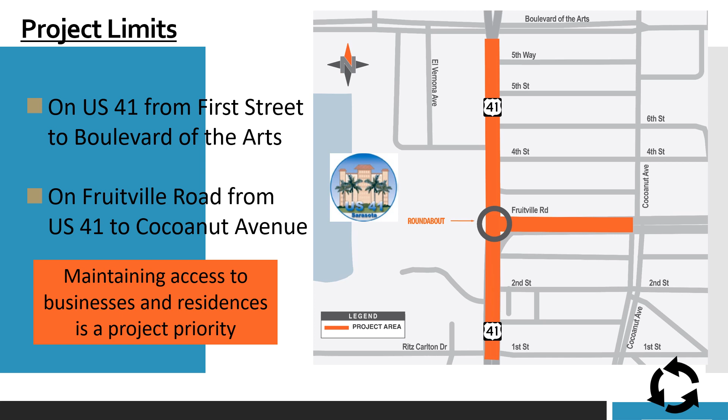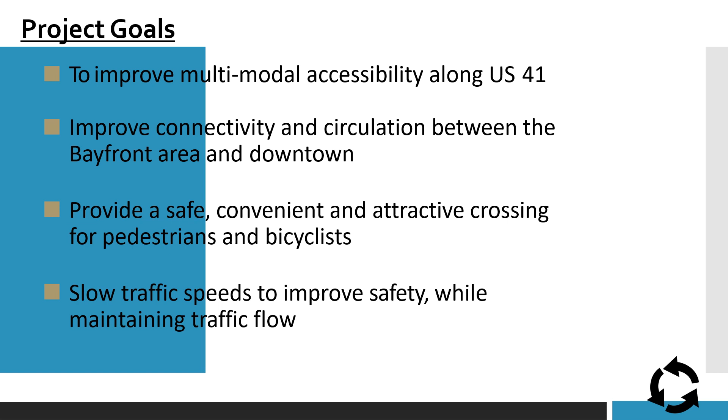The primary goals of the project are to improve accessibility along US 41 for pedestrians, bicyclists, and drivers for a multimodal roadway. The project will also improve connectivity and circulation between the Bayfront area and downtown, provide a safe, convenient, and attractive crossing for pedestrians and bicyclists, and slow traffic speeds to improve safety while maintaining traffic flow.

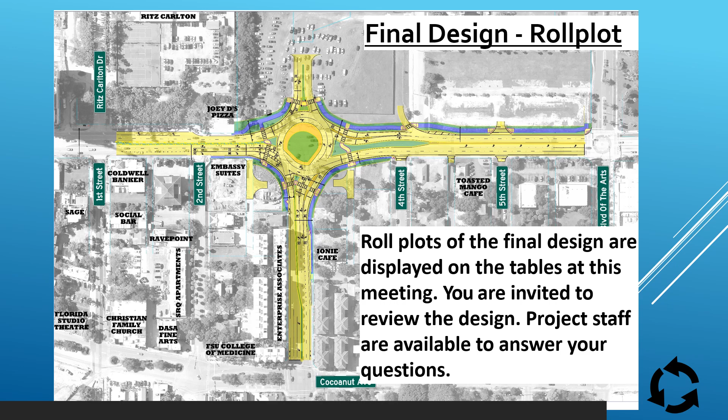Roll plots of the final design are displayed on tables at the meeting. You are invited to review the design and ask project staff any questions you may have about how the construction of the project will proceed.

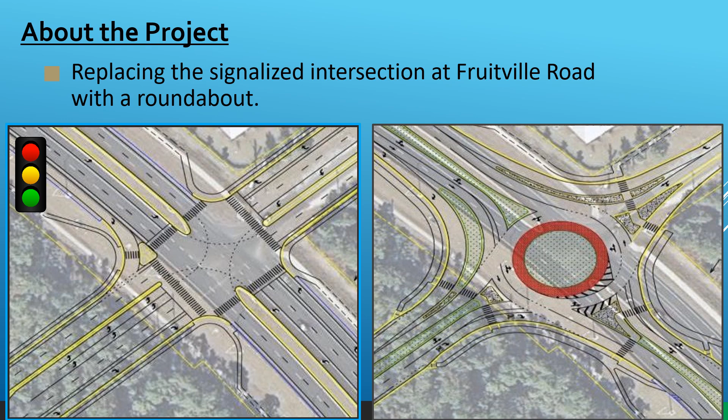The improvements being made as part of this project include replacing the signalized intersection at Fruitville Road with a roundabout, construction of a 12-foot multi-use recreational trail on the west side of US 41, and a variable width sidewalk on the east side of US 41, construction of raised islands for pedestrian refuge, installation of the HAWK pedestrian system, LED streetlights, and enhanced landscaping. The project also includes replacement of the City of Sarasota's utility and underground drainage structures and replacement of privately owned utilities and infrastructure.

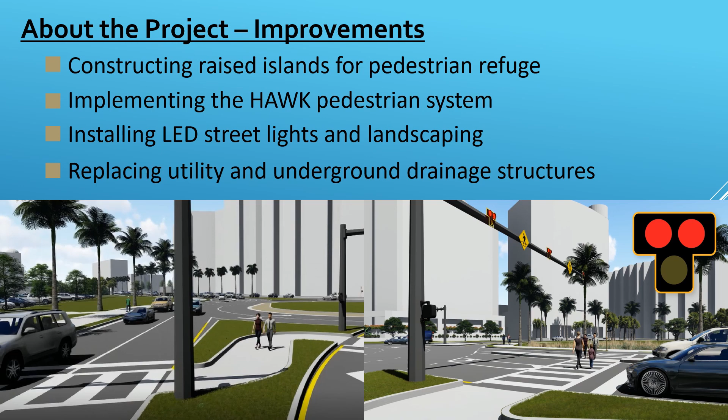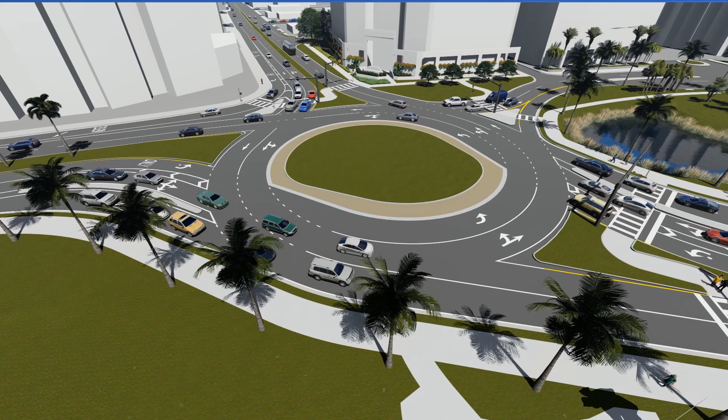Roundabouts are known to reduce speeds along a corridor and improve pedestrian accommodations. However, for multi-lane roundabouts, a pedestrian-activated warning device is sometimes needed to ensure that motorists are aware of pedestrians in the crosswalk. These warning devices are commonly referred to as high-intensity activated crosswalk, or HAWK signal. HAWK signals help to ensure the safety of pedestrians and minimize traffic delays since they are only activated when a pedestrian pushes the button to cross.

The HAWK signal is made up of 3 lights, 2 red lights located above a single yellow light. If you are a motorist approaching a crosswalk controlled by a HAWK signal, then here's what you need to know. If the light is in the off position, then continue to proceed as normal, but remember to yield to traffic inside of the roundabout. If the light is flashing yellow, then slow down as a pedestrian has pushed the button. You can still proceed through the crosswalk as normal.

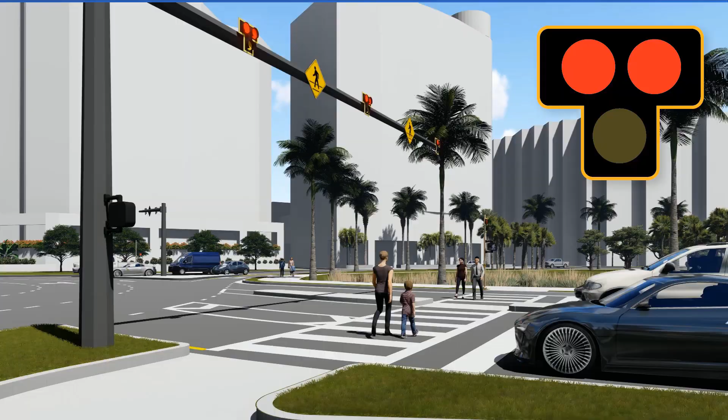When the light turns solid yellow, then this is a warning that the light is about to turn red. Be prepared to stop. When the light is solid red, then you must stop to allow pedestrians to cross. Afterwards, the light will begin to flash red. This means you must stop, but can proceed if the crosswalk is clear. The light will then go back to the off position until activated again.

Remember, a yellow light is a warning that the light is about to turn red. A solid red light means you must stop. And a flashing red light means you must stop, but can proceed if the crosswalk is clear.

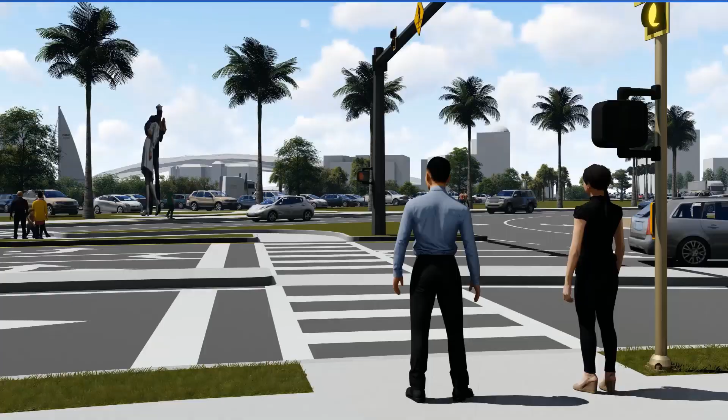For pedestrians, it's much like a crosswalk at a regular signalized intersection. First, press the button and wait for the signal to safely cross. Don't cross if you see the solid red hand, and only start to cross when indicated to do so. Make sure to stay alert to traffic and stay within the marked crosswalk. For roundabouts, a HAWK signal only stops one direction of travel at a time. When you reach the median, press the button again to activate the pedestrian signal to safely cross to the other side of the roadway.

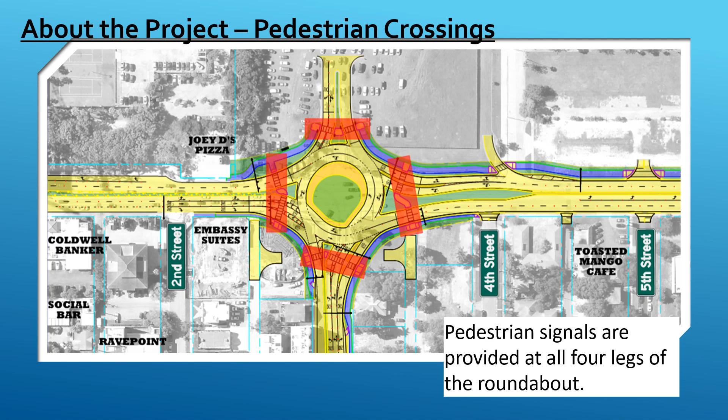Pedestrian signals are provided at all 4 legs of the roundabout to improve safety when crossing US 41 and Fruitville Road. The first phase of construction is anticipated to begin in October and run through mid-January 2020.

Traffic will be shifted to the west side of US 41 while crews begin construction of utility and storm drain crossings of US 41 during nighttime hours. At the same time, crews will construct a temporary detour along the west side of US 41 between Boulevard of the Arts to just south of Fruitville Road. 2 lanes of traffic will remain open in each direction on US 41.

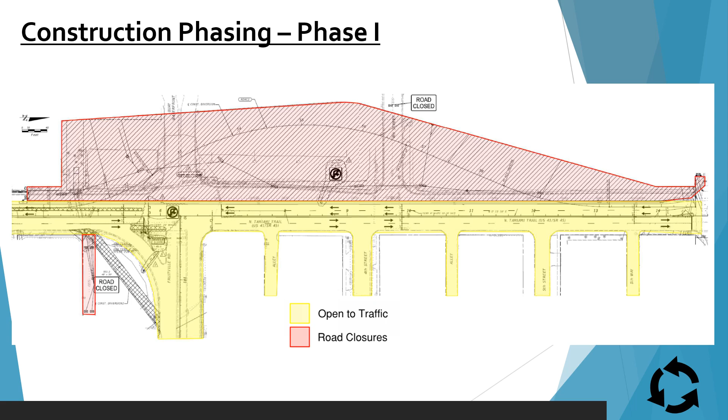The second phase of construction is anticipated to take place from mid-January 2020 to mid-May 2020. Traffic will be shifted to the newly constructed detour on the west side of US 41 while crews begin construction on the east side of the roadway. 2 lanes of traffic will remain open in each direction on US 41. Fruitville Road will be closed to westbound traffic between Cocoanut Avenue and US 41 while the east half of the

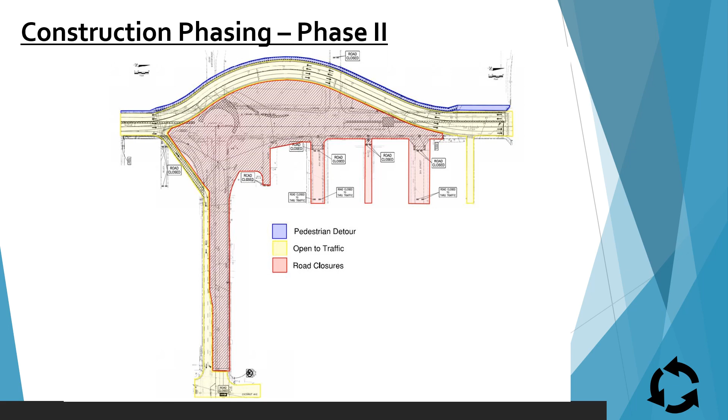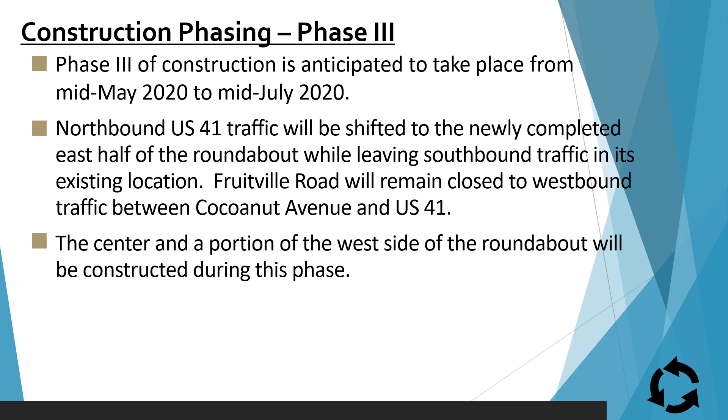roundabout is constructed. The third phase of construction is anticipated to take place from mid-May 2020 to mid-July 2020. Northbound US 41 traffic will be shifted to the newly completed east half of the roundabout while leaving southbound traffic in its existing location. Fruitville Road will remain closed to westbound traffic between Cocoanut Avenue and US 41. The center and a portion of the west side of the roundabout will be constructed during this phase.

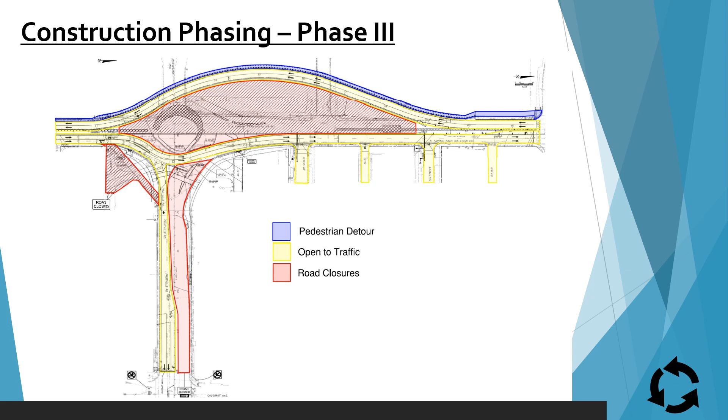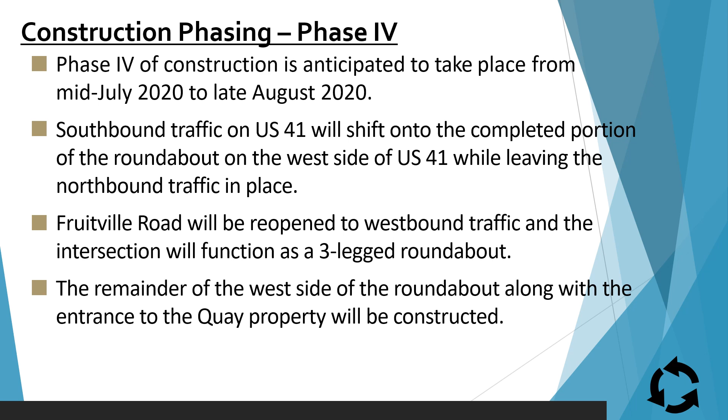The fourth phase of construction is anticipated to take place from mid-July 2020 to late August 2020. Southbound traffic on US 41 will shift onto the completed portion of the roundabout on the west side of US 41 while leaving the northbound traffic in place. Fruitville Road will be reopened to westbound traffic and the intersection will function as a 3-legged roundabout. During this phase, crews will construct the remainder of the west side of the roundabout along with the entrance to the Quay property located to the west of the roundabout.

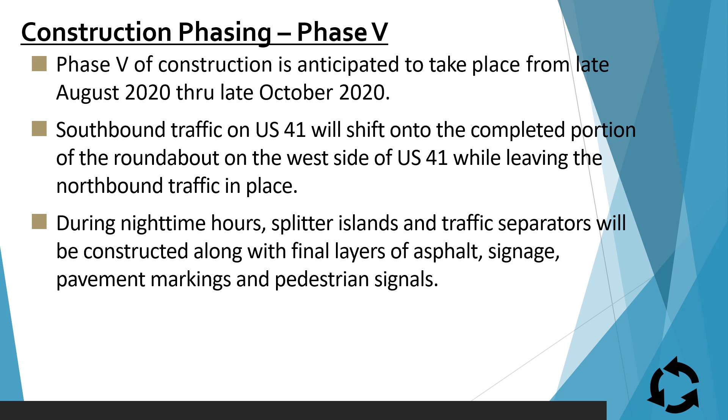The final phase of construction is anticipated to take place from late August 2020 through late October 2020. Southbound US 41 traffic will shift onto the completed portion of the roundabout on the west side of US 41 while leaving the northbound traffic in place. During nighttime hours, splitter islands and traffic separators will be constructed along with the final layers of asphalt, signage, pavement markings, and pedestrian signals.

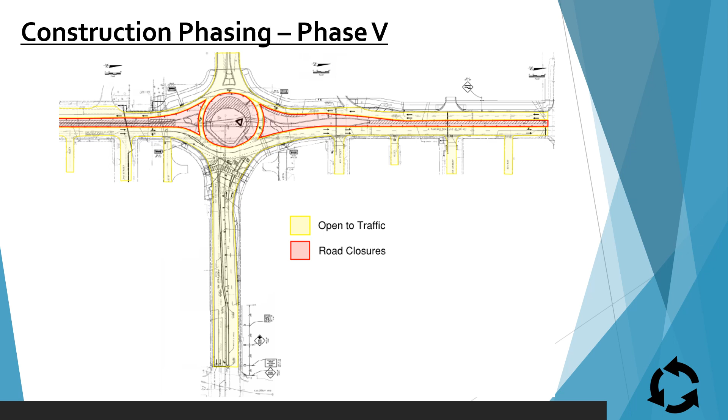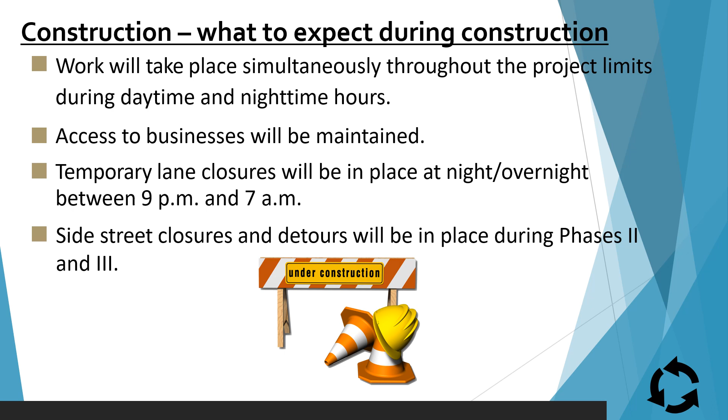While construction is underway, crews will work simultaneously throughout the project limits during daytime and nighttime hours. Access to businesses will be maintained. Temporary lane closures will be in place at night or overnight between the hours of 9 p.m. and 7 a.m. Side street closures and detours will be in place during the second and third phases of construction.